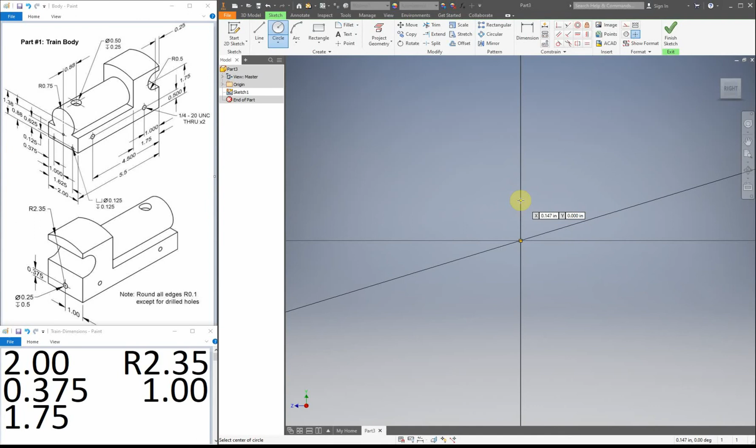On our paper we have the radius, not the diameter, so I'm going to type in this number I have right here: 2.35, and then multiply it by 2. Make sure you multiply it by 2 because you have radius and we want a diameter. Right now it's off my screen, so pressing home on my keyboard.

Now I'm going to add in some lines. I'm going to place a line here, and make sure it connects. I'm going to place my other line here, and make sure it connects.

Now I'm going to add in my dimensions. This bottom dimension here is going across the very bottom, as I can see on this angle, it's not shown. But I know this is a mess of dimensions and it's a little hard to read. We're going right down here, and then we follow this one also down, and we can see that is 2 inches.

Alright, now we're going to get this bottom edge to this center point. That dimension we can see on the back, that is 0.375.

And then we're going to see that we still have 2 green lines. We don't want the green lines, so we're going to click here and pull it down. Now we got both of our green lines turned blue, but we still need to put our dimension. We can see from our center point over, I know it's on the other side over there, but 2 divided by 2 is 1, so it's the same. So we have 1 inch.

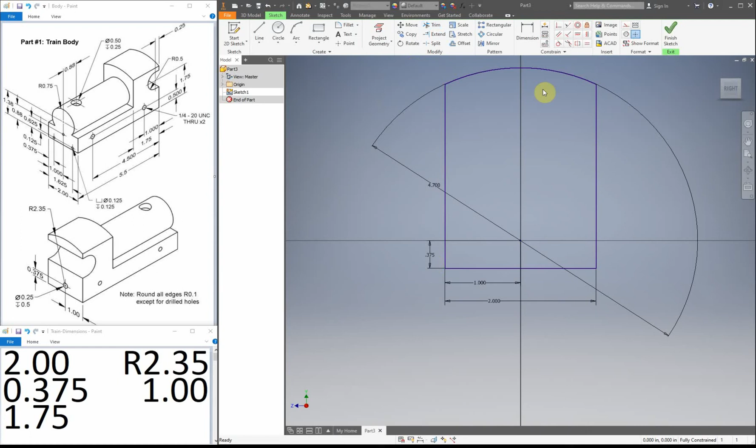Alright, so right now we kind of have a little bit of a mess of everything there, but now we can read everything. One thing we still need to do that I like to do on here is trim this up. I like to do this personally because sometimes it makes extruding later on a little bit easier. So just trim that up, and now we can finish.

And now we extrude. So the depth of this, let's see, not on that view, alright, so going from this edge, go down - oh, there's my number, and if you need to see it larger, it's right here, so 1.75.

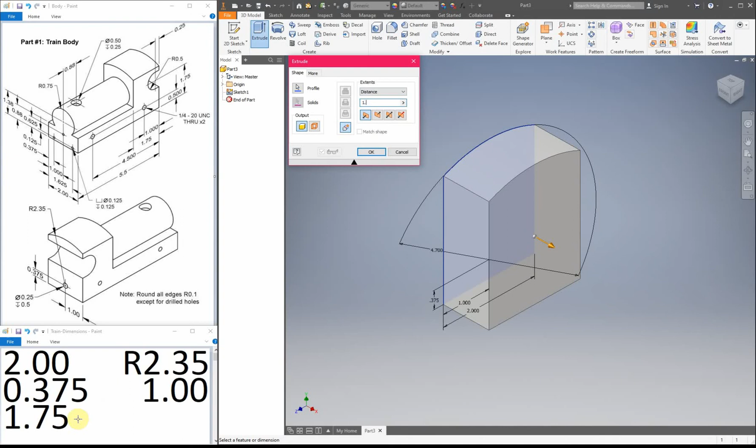Alright, so that's my first chunk of dimensions, going to my next piece. I'm going to start a 2D sketch on this surface, where it says right over here. I'm going to use project geometry and my rectangle tool, so I'm going to click on here and click over to here.

So the dimension for this bottom edge is already pre-dimensioned for us. We don't need to put that in because I clicked on this corner and this corner. So right now I should have 3 blue lines and 1 green. Now I'm going to click on my green line and the blue line opposite that line. The dimension for this, if we look in our mess of dimensions, from this corner, go over, we have 0.88. If you need to see it larger, 0.88.

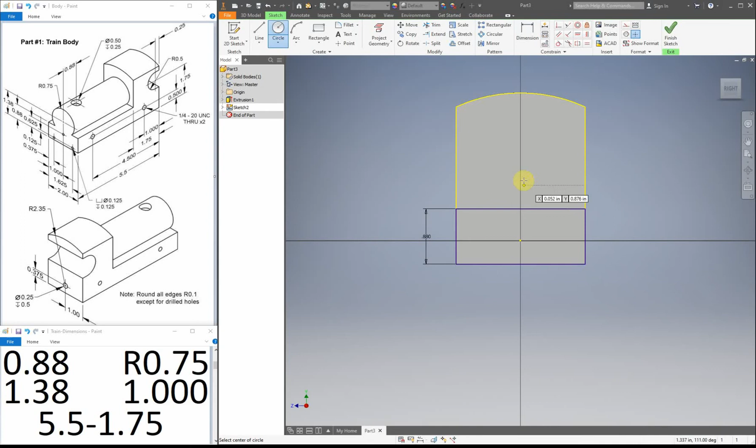Alright, so we're drawing this front face, and now I'm going to add in a circle. I know it's not lined up perfectly in the center, that's fine. Now, let's see, our dimension for this, on our paper we have another radius, which is not exactly what we want. So our dimension for this is going to be 0.75, and then again times 2, because I have a radius and I want to put it in as a diameter.

Alright, so right now it's fully green, we need to lock it in place. So I'm going to go from the edge to the center point and pull it down. As we look here for the center point of our circle, or on this it looks like an arc, if we go down, we have 1 inch.

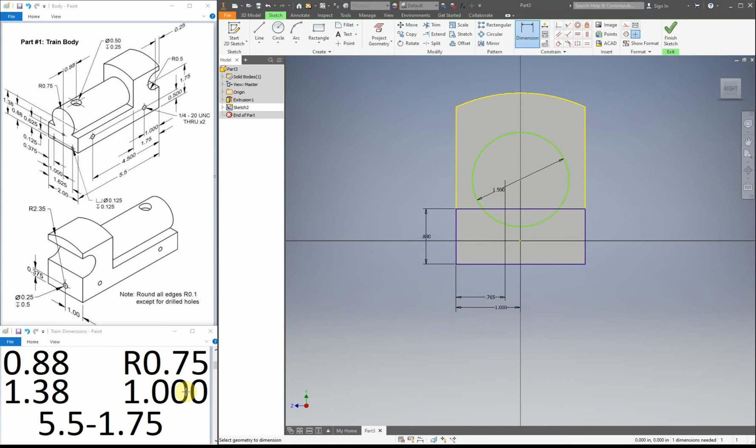Alright, again, going from the very bottom to the center point and moving over. You can see now that it's fully dimensioned, locked in place, but we still need to add in that dimension properly. We can look over here at our center point, move over, and we can see that it is 1.38.

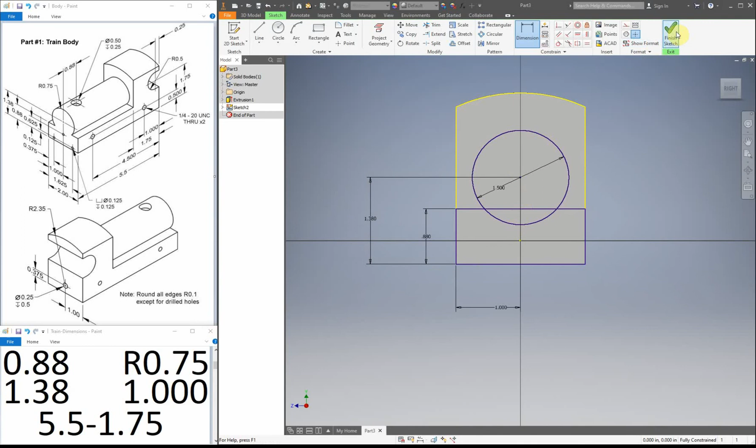So this is now fully dimensioned, and we can finish and extrude our two shapes. You've got to click on both shapes. For this one, I have a little equation, and the reason for that is the entire length of our part is 5.5 inches, but we already have this little piece in the back. So I'm going to type it in as 5.5 inches minus this back piece, which is 1.75.

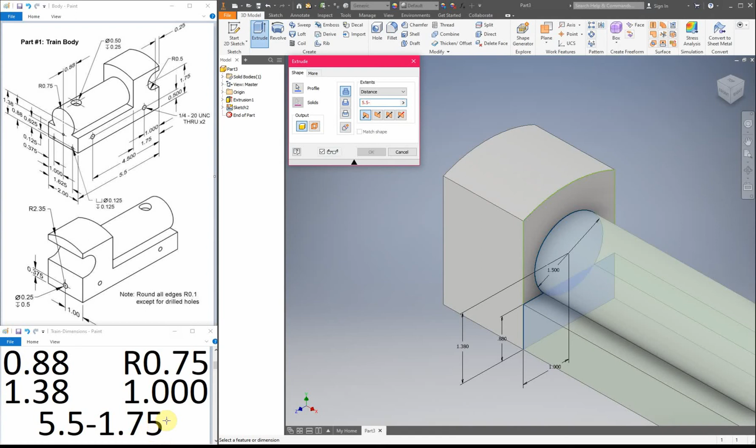So right now we kind of have the base of our object. We're starting to see the train come together.

So our next portion, we're going to start a sketch right here, and we're going to do this little cutout piece. Project geometry, and I'm going to put a rectangle in. I'm going to make sure the first point is connected over here, and I'm going to place it in.

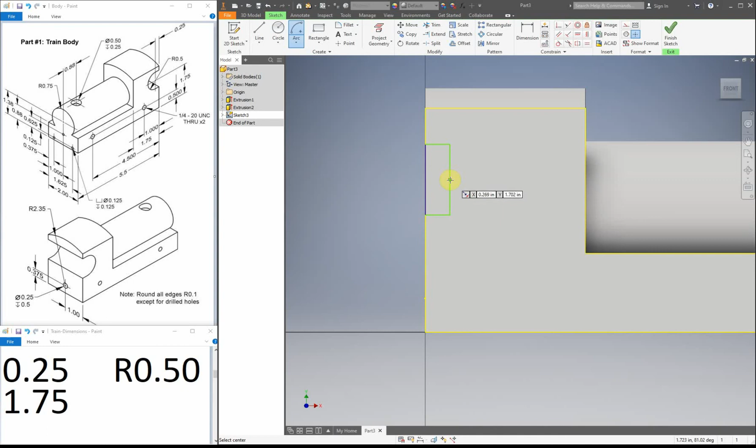The next thing I'm going to do is put in a center point for my arc. Place it here, place the other piece there. The reason why I didn't put the dimensions in yet is because it's a little bit easier to put them in after the fact, since I'm going to be using this center point to go to the very bottom. If we look at our drawing over here, that's what it's referencing, so I need to put both of them in before I can start finalizing our dimensions.

So that dimension is 1.75. Then we have a radius, which if we look here is 0.5. And for our rectangle, that last dimension we need to add in, if we look right here, is 1/4 of an inch, so 0.25.

One thing I'm going to do to clean this up a little bit is take this one line and turn it into a construction line. What that'll do is take this entire piece and make it into one, so when we try to extrude, instead of having to do multiple clicks, it is just one piece.

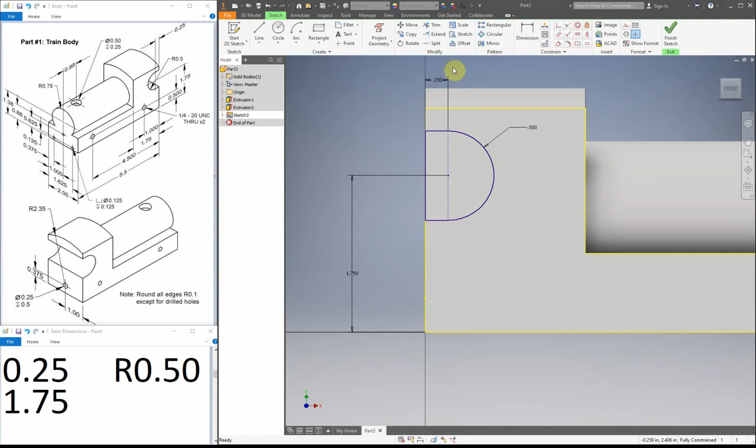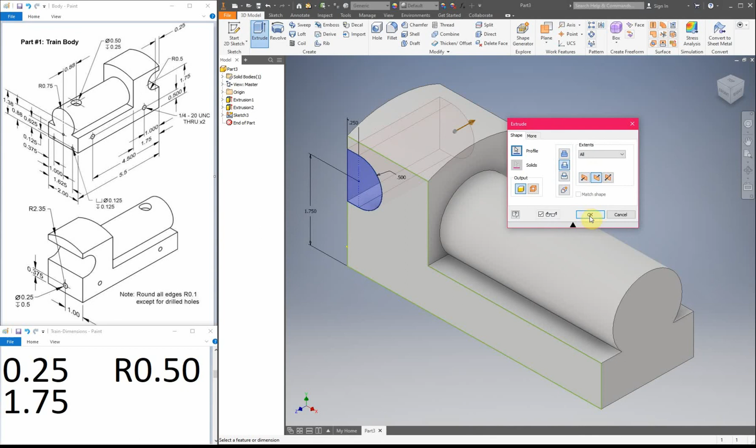So now we're going to extrude this piece. You can see that it's going out and adding material. I don't want that, I want to do cut, and then I'm going to change the distance to all. The reason for that is it cuts through the entire thing. I know I could have left it how it was since it did cut through all of it, but I like to change it to all just in case I realize I messed up a dimension and need to go back and fix it. So click OK.

Alright, so now we have our fillet. For our fillet, I know it says round all edges, so we can click on round all edges, but I also like the look of it when I fillet all the edges too. So I'll leave that to you if you want to do that or not. It's not necessary, but personally I think it gives it a little bit more of a polished look.

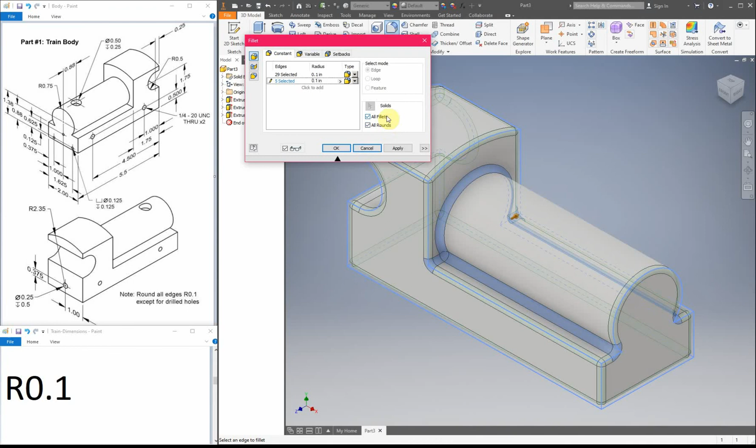So the dimension we need to add in, if we look at our note over here, is 0.1. The default is 0.125, so we need to get rid of some of those extra numbers. Make sure if you do rounds and fillets, the fillet has the same dimension. Then just click OK.

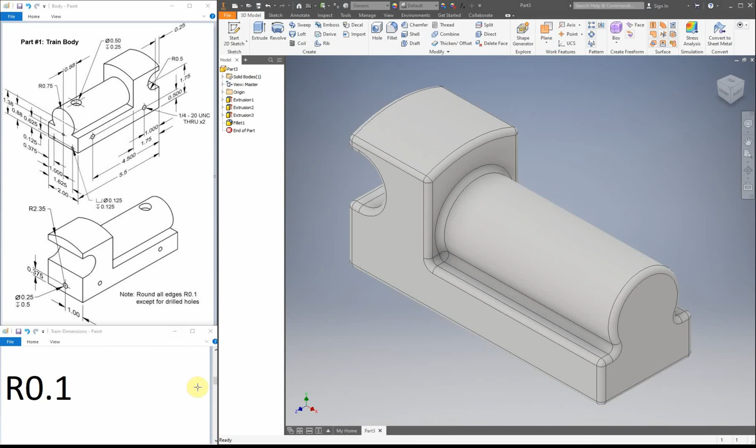So our train's looking a little bit more like our actual train. I know on this image it doesn't have all these rounded edges; that's just to make it a lot easier to read where the dimensions are coming from. The reason we're doing the rounded edges and fillets right now is because when we drill the holes in for the wheels and the cow catcher and other components, we'd need to unselect all of those if we did the fillet feature later. So it's a lot easier to do it now, using the fillet all and round all boxes, instead of having to click on all of them manually.

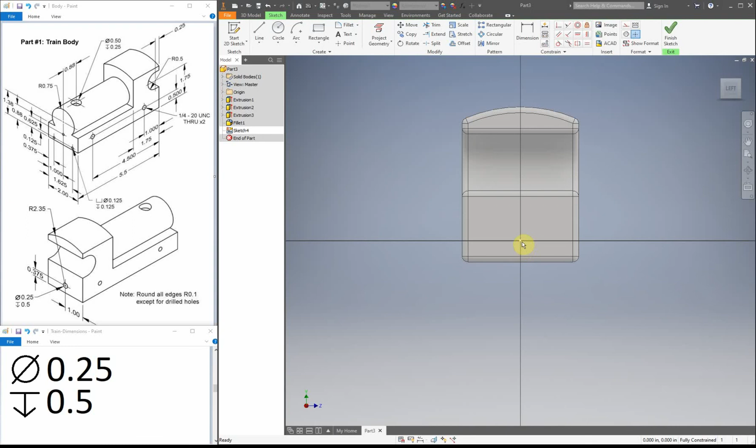Alright, so the next piece I'm going to do is go to the back, start a 2D sketch, and we can see that point we were using earlier. So what I'm going to do now is take a point and place it directly on top. It basically just went invisible right now, but there is a point there, so I'm going to try to highlight it. You may or may not be able to see the little highlight I'm doing. Alright, finish sketch. So that one we constrained directly to that, that's why I'm not giving you dimensions for it. It's the exact same starting point we did for the beginning of the piece.

Now I'm going to use the hole tool. If you've been using this hole tool recently, it'll pull in all of your defaults from whatever you just did, so I need to undo all this. I need a simple hole, the seat needs to be none, I still need a distance, and let's see, it is going the correct way. Flat point instead of a point.

Alright, so now I'm ready to actually put in my dimensions. So my diameter, which is this piece right here, if we look on this, all I did is take this little bit and made it larger for you. So it's 1/4 inch for the diameter, and the depth is 1/2 inch.

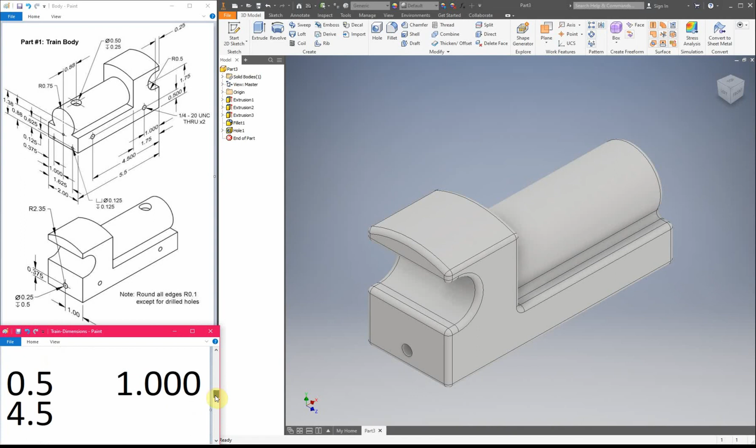So that is it for that side. So the next piece, we're going to start our sketch on this side. I'm going to just orient it the same way that we have in the drawing, just so you have a better idea of what I'm talking about for the dimensions.

So I'm going to place in 2 points. Right now I'm just going to place them in. Make sure you don't get any of those dotted lines, because you don't want it to be accidentally locked into something. And these 2 points are going to be used for the hole tool later on.

So I'm going to use my dimension tool. I'm going to go from here to the very bottom, not to this edge right here, the very, very bottom, and then click. So if we look over here, we can see that that is 1/2 inch.

And these are going to be at the same height, so I'm going to do the other one at the exact same time. Remember again, very, very bottom. 1/2 inch. And now we're working our dimensions from this back edge.

So I'm going to click on my back edge and this point over here. And looking at the drawing, it is 1 inch. Alright, so that just turned blue, so I know it's fully constrained.

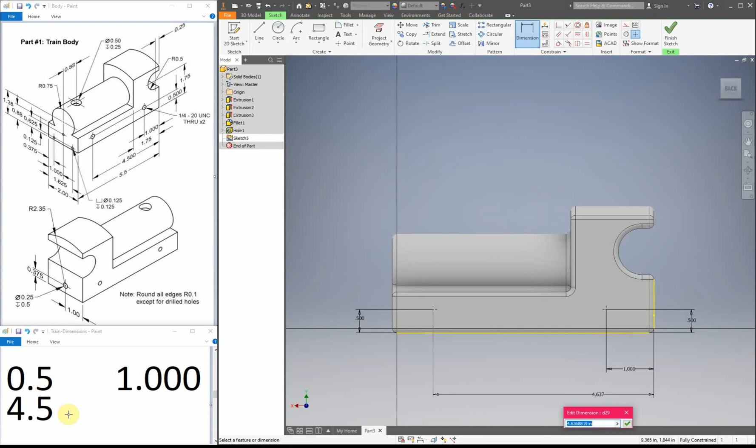Now I'm going to do the next one, again from the back edge. Looking at our dimensions, it is 4.5 inches. Alright, now finish sketch.

And hole tool. And because we have those points and only one sketch, if you have multiple sketches, it won't be able to find it. You need to click on the actual points and then I'll fix it.

So for this one, I want it, let's see, to be threaded, so tapped. Alright, and oh, the default happens to be what we want for most of this. So if you look at the designation, I have it written down the exact same way that it is on the paper, and the designation just happens to be the same unless you were playing around with it and changing some settings. The distance I want to be through all.

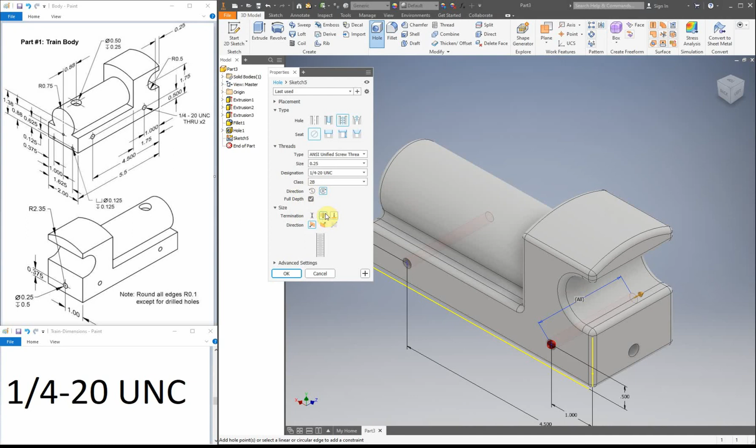And here's something that sometimes gets missed: thread depth. For this, I want it to go all the way through. Let's see, I guess in this version we're going to have to type it in manually. In a different version, oh, there's the button: full depth, okay, so it's a little checkbox. So if you do miss the checkbox and have to type this in, it's going to be 2 inches to get the thread all the way through. But here is our lovely checkbox, so then if we do have to change the dimension later on, it's still going to be full depth no matter what. So click OK. Alright, we are almost there.

So now we are going to have to create a sketch on here. The problem is it is a curved surface and the 2D sketch will not work there. So we're going to create a plane.

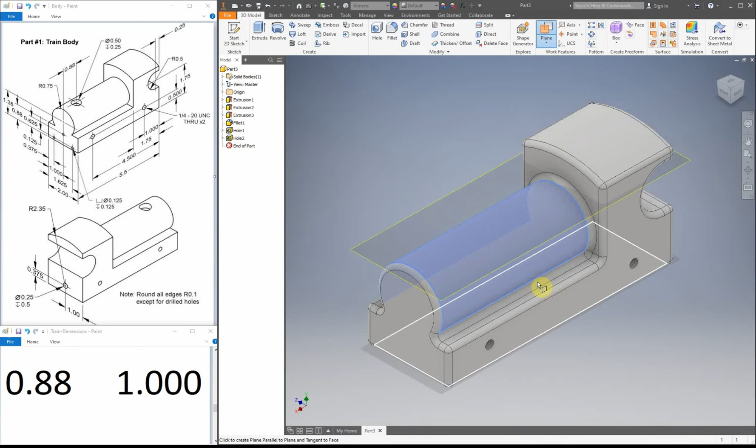Alright, so I'm going to click on the curved surface first, and this is one of those things where you just got to move the mouse until it's exactly where you want it to be. So it's taking up this bottom piece and kind of making it parallel. And 2D sketch, we need to click on the edge. If you click on it, you click through it. If you click on the edge, well, now we clicked on our new work plane.

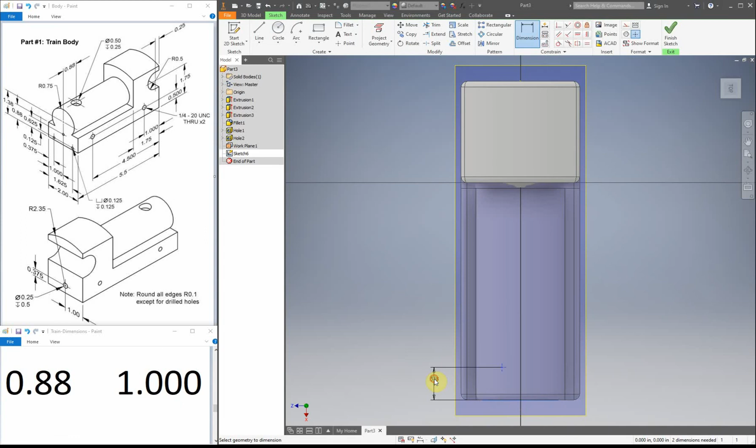So I'm going to add in a point, again trying not to lock it on anything. I'm going to go from this very bottom to our point, and I can see right here that it is 0.88, and it is also right in the center. So I'm going to go from the edge. Remember, you want to go from the very edge of the train. Click on our dot, or our point, click over, and that is going to be 1 inch.

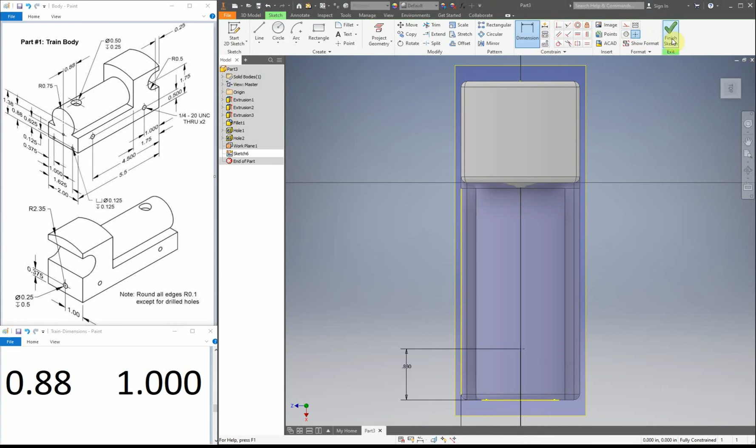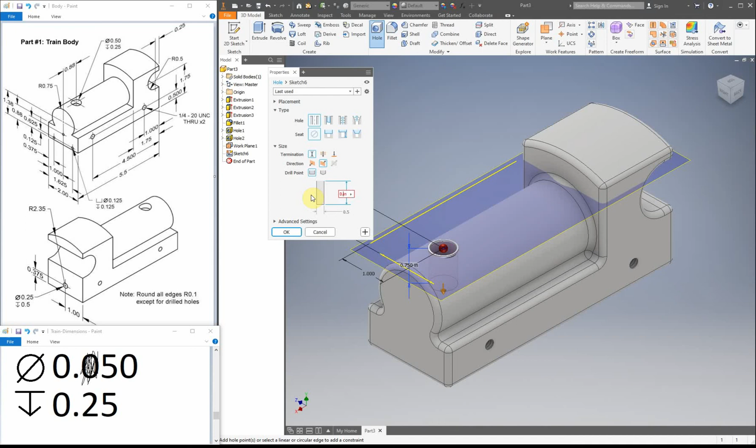Alright, so finish. Okay, so our hole is going to be a simple hole. It's going to have a termination. And I can see that it's trying to come out of the part, so I'm going to flip it. And let's see, we have a diameter of... oh, I have a typo. Ignore that extra 0. Okay, so we have a typo there, and it should be 0.5. And the other one is going to be 1/4 of an inch. Then click OK.

Alright, so the next part is going to be a little bit confusing. And oh, before we do that, just to clean this up, on your work plane 1, you can right click and then visibility. Don't delete it, because if you delete it, it'll try to delete the hole that you just placed in. So instead, we're just going to make it invisible.

Okay, so now for the hard part. We are going to start a 2D sketch on this front end of what the user would call the front of our train, and for mine it's called the right. I'm going to place in 3 points, and again try and make sure I don't accidentally link them to anything. I know they're just kind of thrown in all over the place. So I try to put these so they line up, so you can kind of see what I'm doing.

But we have our first hole, and we're going to go from the very bottom over. So if we look at this, and let me just make the cursor a little bit bigger - there we go, paint can. Alright, so we have 0.125. And then from our edge down, so that's another one that's a little bit hard to see, it is 0.375. So our first one now is fully constrained.

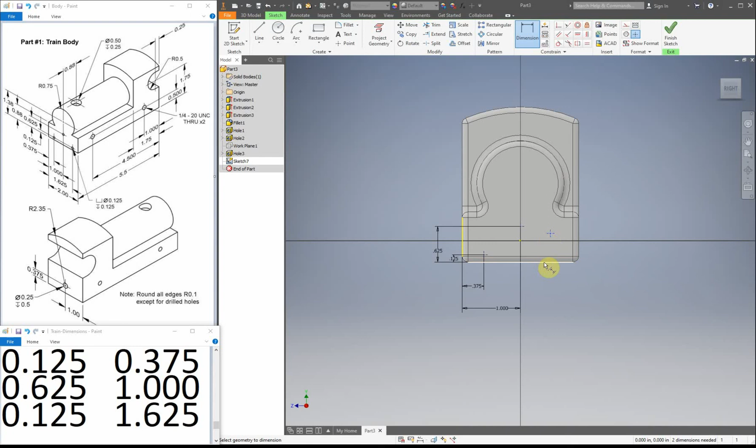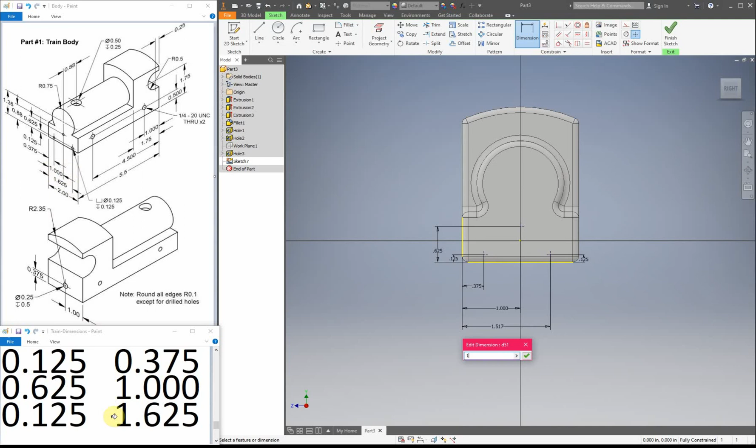And our point, the bottom, over. And it happens to be the same height as our first one, so it's 0.125. And our last dimension for this little piece, or part of it, right here, it is 1.625. Alright, now I can finish sketch and use our hole tool.

Need to flip it the other way. Oh, now it went away. Okay, so our termination... there it goes. Our termination is going to be, let's see, 0.125. And if you're looking at the drawing, it's right here.

And it also has a flat bottom. I guess I forgot to put that little icon in there, but just make sure the bottom for the drill point is flat. And then for our diameter, it happens to actually be the same number, so I have 0.125.

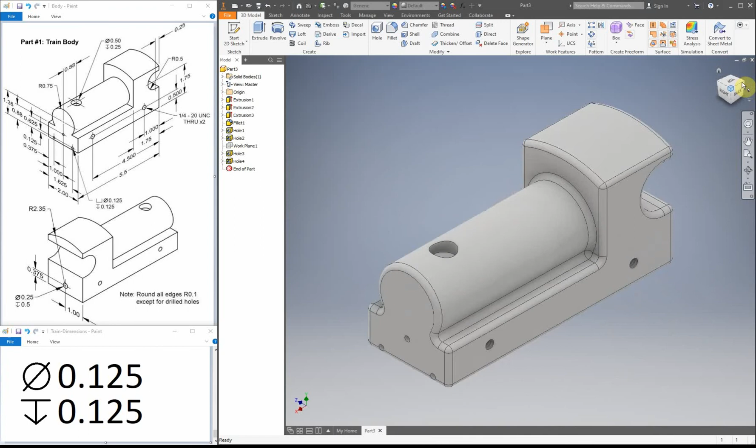Alright, so that is our train. So let's just do a double check to make sure we have all the holes drilled in. Okay, so we have the one on the back, the sides, one on the top, and our front. Okay, so we have all the holes drilled in. So that is the part.